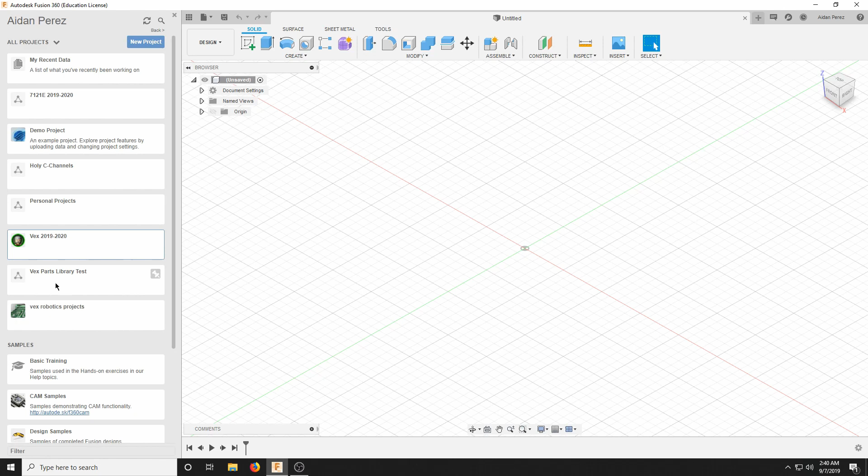So I'm going to create a very basic chassis using this part library that I made in the last tutorial video. If you haven't seen that yet, I recommend you watch that first because that tells you how to get all of these parts in the first place. We're going to be focusing primarily on just one part for the majority of this video, and that is C channels. So I got two files here, the holey 3 wide and the holey 2 wide.

I'm not going to get into topics of build quality, but we're going to make this chassis out of 2 wide C channels, and we're going to make a very simple 30 by 32 chassis.

So first we're just going to save real quick, because you can't drag and drop anything until you save and name a project. So we're going to name this something simple, early season chassis.

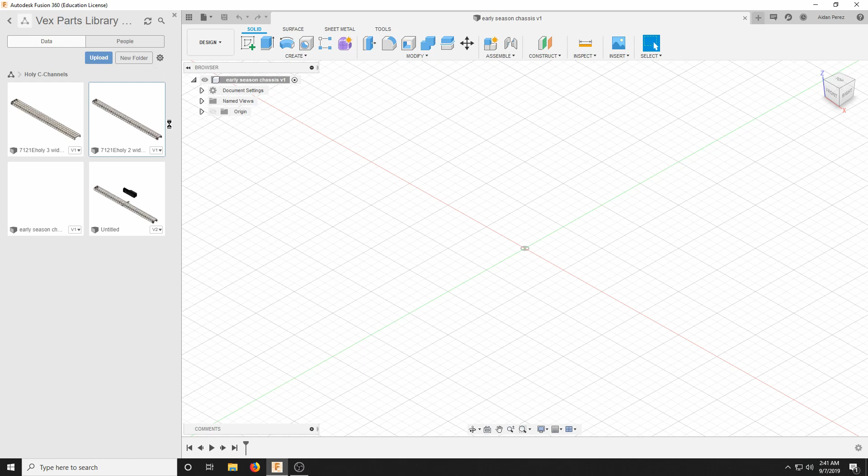So now that we got a project here called early season chassis, we're just going to drag and drop a couple C channels here. We are going to angle them in the way we want them to. So this is a demonstration on how to rotate and manipulate the angular geometry of your C channel.

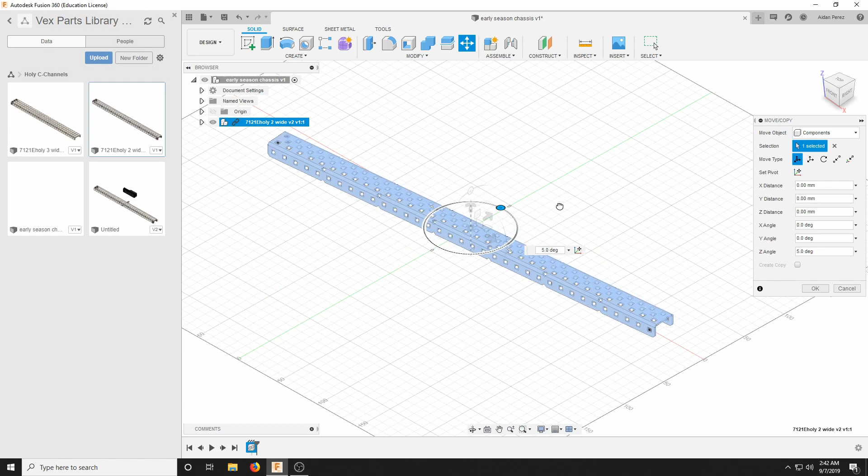So you can rotate them on the X, Y, and Z axis. Here we're rotating on the X and the Z - it's kind of hard to determine in a three-dimensional view. Oh, actually it's telling me right here it's the Z angle. Alright, so I'm royally failing at this tutorial already, but that's irrelevant.

We're just going to eyeball what angle we need this to be at, and we're going to flip this around for simplicity's sake. Alright, perfect. So as you can see, we got a C channel, and we're going to copy and paste it just so we have two of them.

You don't necessarily have to copy and paste, you can just drag and drop on every C channel in, but we're just going to copy and paste because why not? So now you got two C channels. These are going to be the C channels that go along the width of the robot.

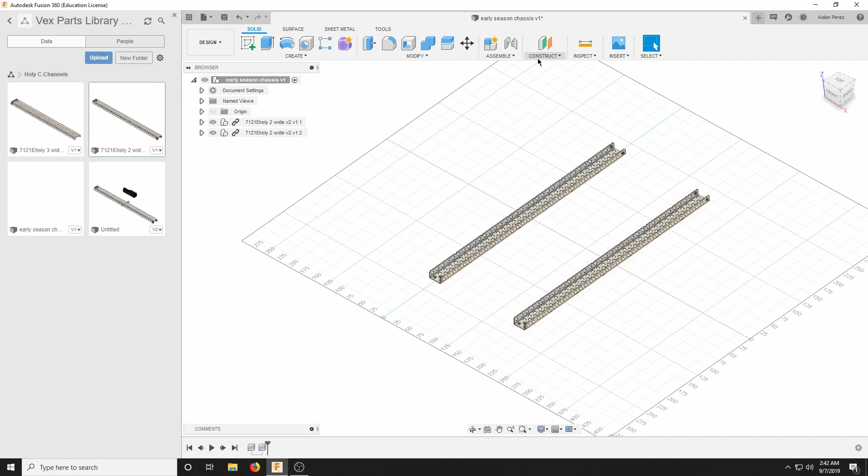However, how do we cut these C channels? Because as you see here, they're 35 holes long, but we need this to be 30 holes long. Well, the way we do that is by using midplanes.

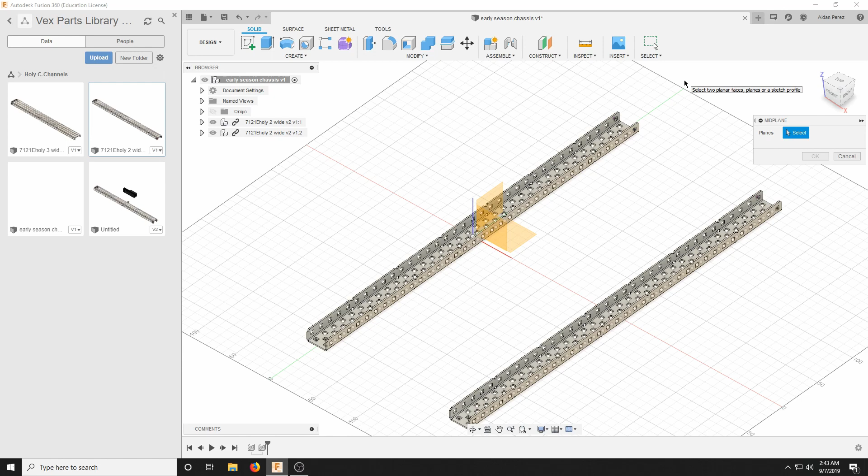So what you're going to want to do is go to construct, and you're going to want to find the midplane option. And you're going to be put up to this screen. So the way that you create a midplane is by selecting any two planes, any two flat surfaces, and it will create a construction plane of sorts in your project.

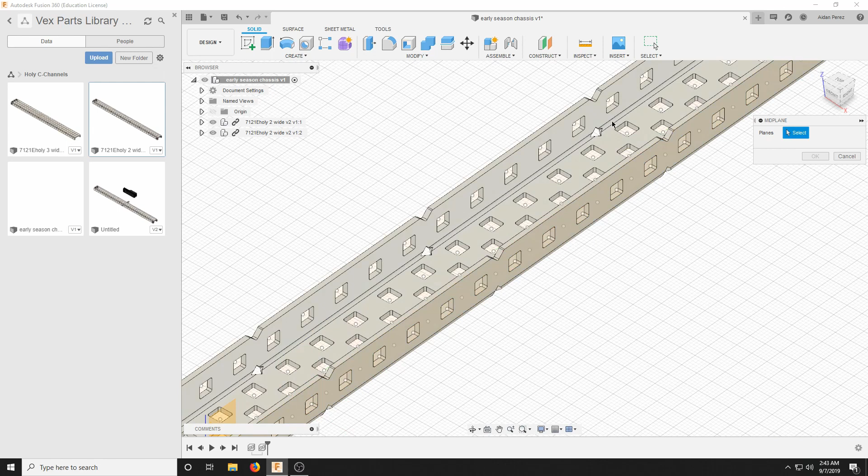Basically what I'm saying is, if you want to cut a C channel to a particular hole, you're going to want to find one of the middle holes of the C channel, and you're going to want to create midplanes between the two holes. So in this case, we want to create this 35 long into a 30 long.

So we're going to want to chop off these 5 holes. We're going to go to this middle hole, and select this plane. We're going to angle it, and select this plane. And it'll create a midplane in between these two planes, hence the term midplane. And we're going to click OK.

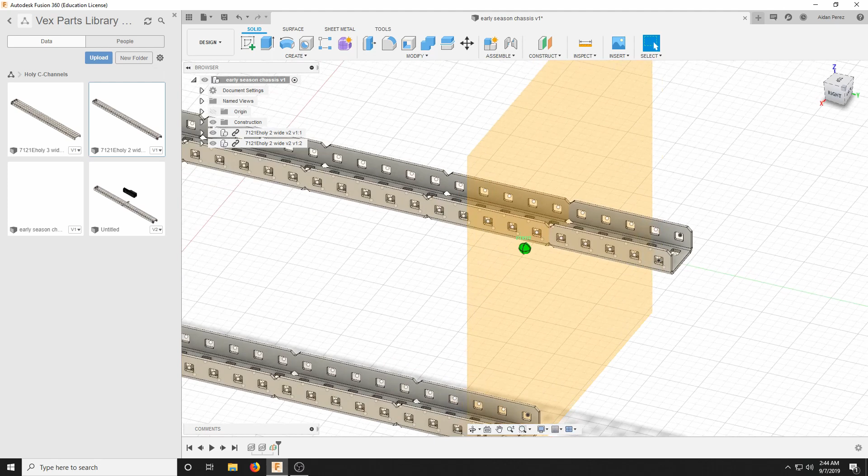So as you see here, it has created a sort of imaginary cut that goes in between the little nook in the C channel. So now that we created this midplane, we're going to go to modify, and we're going to go to split body. We're going to split the part that we want to cut, which in this case is the C channel.

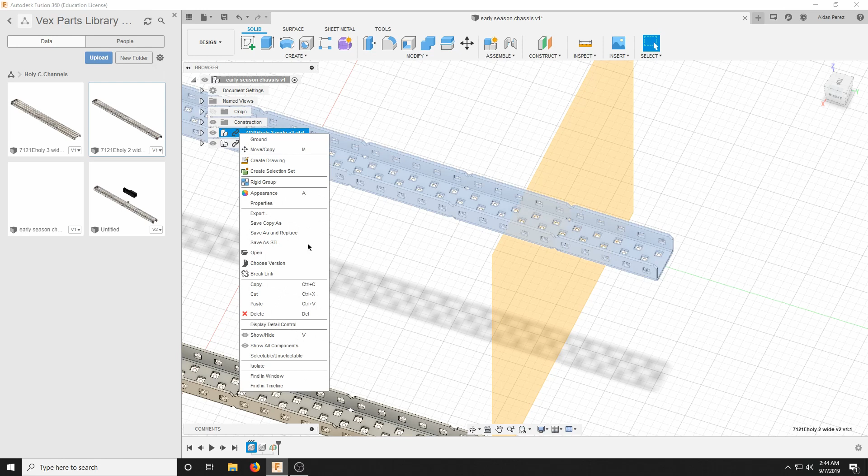So the body to split is this, and I have made an oopsies because I did not unlink the C channel. Hold on. You're going to want to break the links on both of these C channels before you actually do anything with them, or else you can't modify them.

So we're going to split the bodies, we're going to select the C channels, and the splitting tool in this case will be the midplane. And now we're going to click OK. Now notice here we have this line going through the C channel where our midplane is.

We have created two separate bodies: body 1, which has the 5 holes we wanted to cut off, and body 2. Now we know we want to get rid of body 1 because those are the 5 holes we need to get rid of to get 30 wide.

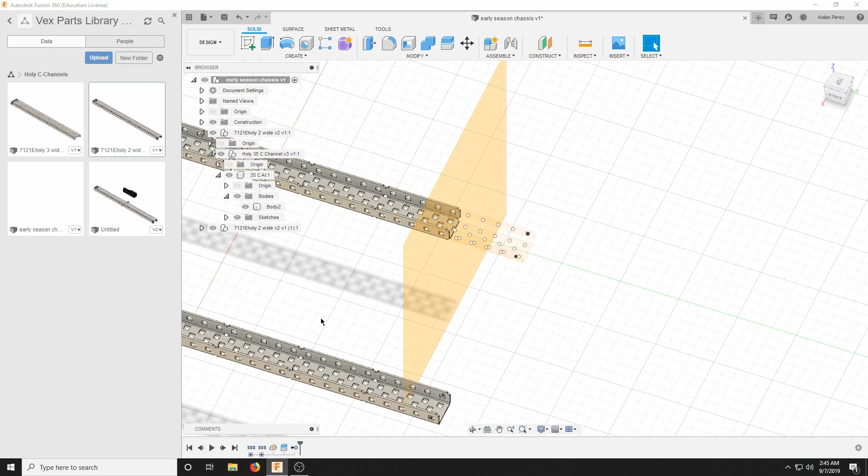So what we're going to do is right click on body 1, and we are not going to click delete. Clicking delete creates some awkward issues that are easily avoided if you just click remove. Once you click remove, you're free to delete the midplane. But only delete the midplane after you remove, not before, or else you're going to have to redo everything again.

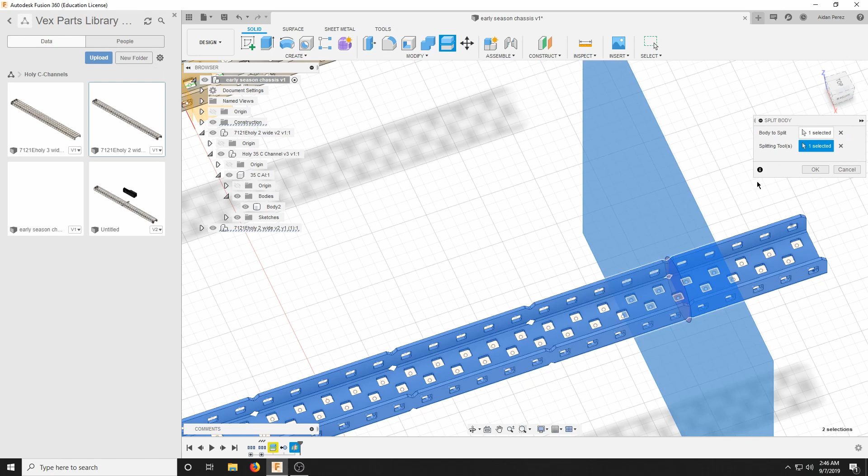We're going to do the same thing here. We're going to create a midplane by going to the middle hole of whatever we need cut, so we're going to cut off these 5 holes. We're going to split body using the splitting tool, and then go back here.

See that we need to get rid of body 2. Right click, remove, and then delete the midplane.

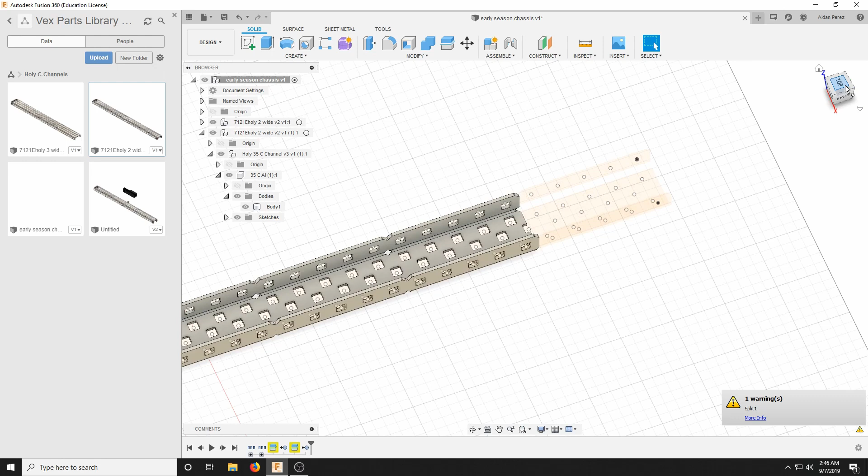Now you see we have these little ugly floating dots and planes. These have no reason to be here. Obviously we're not going to join anything to anything here, because if this was a real robot, this would just be empty space. So at this point, you're free to use the selection tool, which is your left mouse button.

Just drag over these excess planes, and you should theoretically be able to select them. So you could just hover over those, select all of those, and delete using the delete key on your keyboard.

And you'll still have these little dots. There's not really anything you can do about these, they're always going to stay, but it does clean up things a little bit. If you use an app like A360 to view your CADs, none of this shows up—it'll just show the solid bodies, none of the iMates or construction planes.

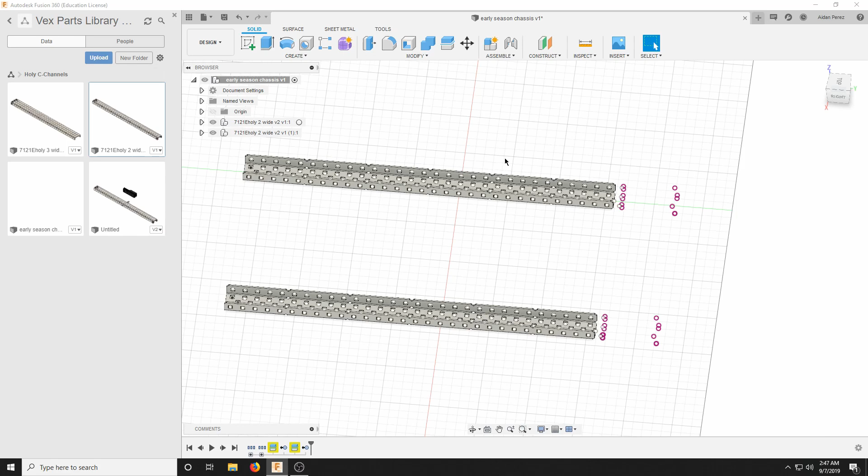So now that we have these 2 C channels, we need to give them, say, longitudinal, lengthwise C channels to accompany them. So we're just going to spawn in 4 C channels and orient them to how we want them.

Usually if you want to save time, instead of just going here and dragging it to 90 degrees, you can just go here, edit it a little bit, and then just type in 90, and it instantly snaps to it.

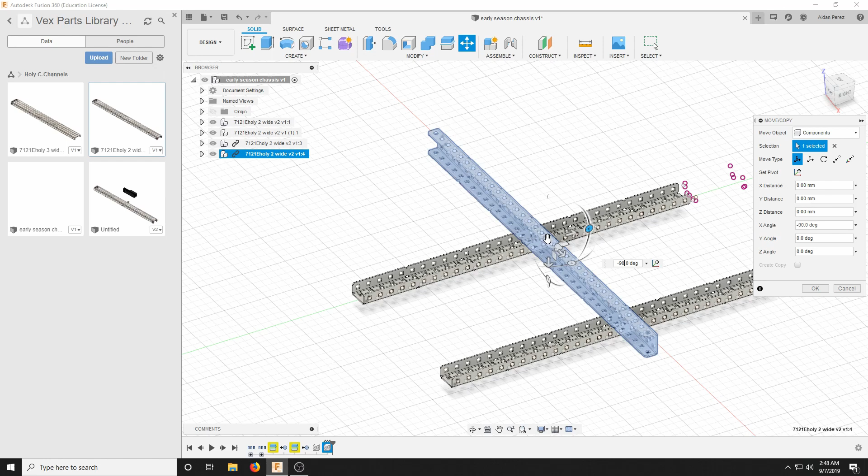So we're going to create just 4 C channels. Really doesn't matter where they are now. We're just going to plop them into randomness, and we're going to make them all coherently attach in just a minute.

Okay, so we have all of our C channels, and we don't necessarily need to break the links on these, but we're just going to go and break all of the links here, since we are going to cut these—we're going to cut 3 holes off of them. We're just going to move this out of the way so it's a little easier to see what we're doing.

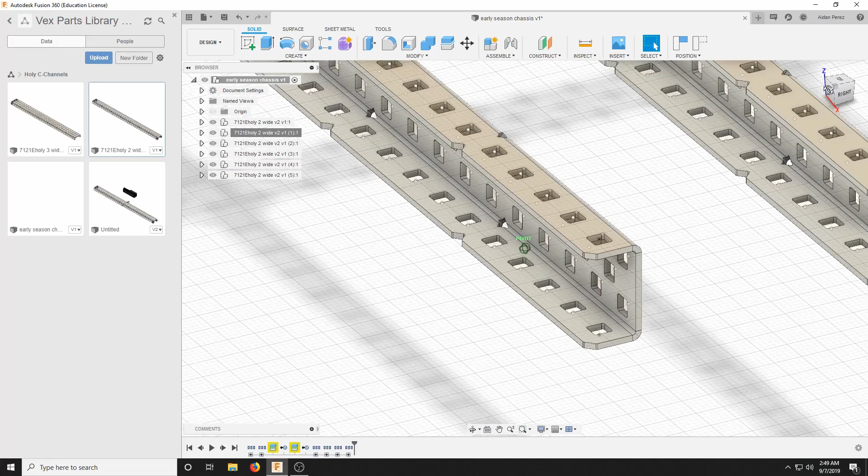And we are now going to joint the C channels together to create a rigid structure. So to do this, notice how on all of the C channels we have these little white dots. What we're going to do is select one of these white dots.

Well, first we're going to click joint and click continue. Capture position—sorry, you want to click capture position.

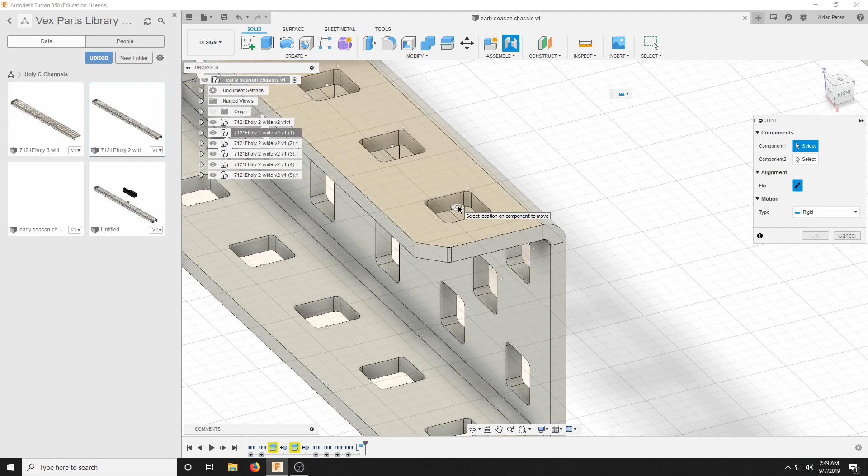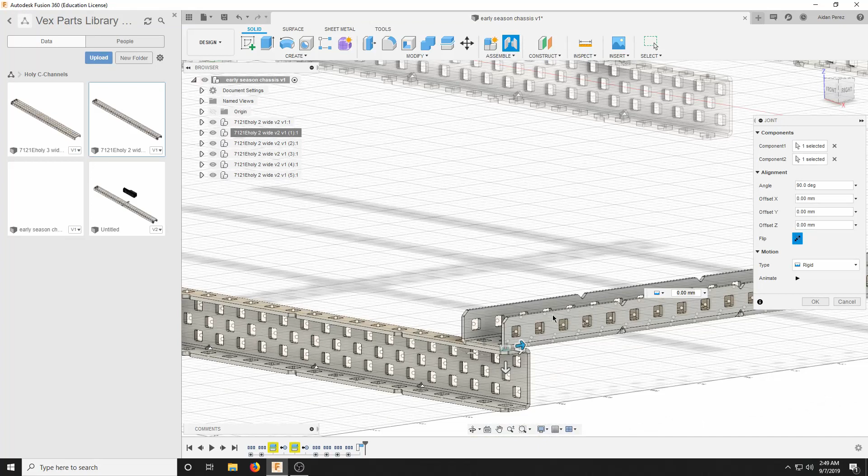And you're going to want to select these dots. So you're going to select the dot here, and select it to the accompanying dot that you want to mount it to. So in this case, we're going to mount it to this dot. It's not arbitrary where we're mounting it—this is just so if this is how you want your structure to look, you're going to match it to how you would want it to look in real life. And then we're going to click OK.

And we're going to repeat that. We're going to make this, say, a 4-hole wide wheel gap. Select that—1, 2, 3, 4—and then just pop it here.

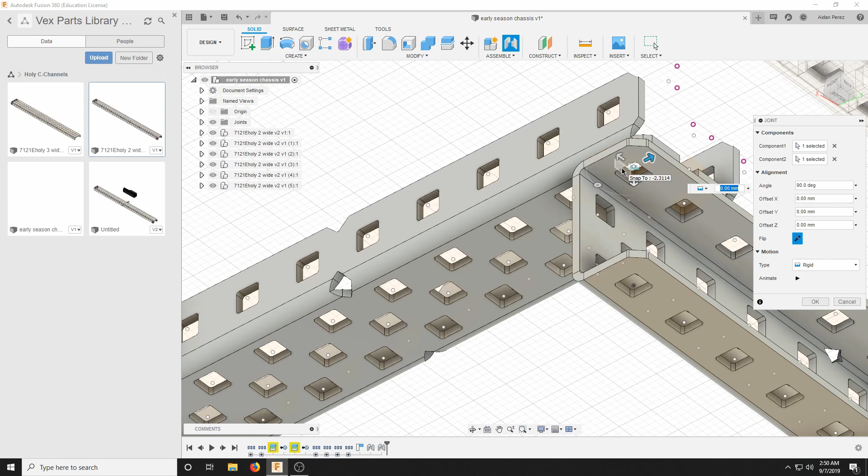We're going to repeat that with the other two C channels. This is basically the fundamental idea of how you connect C channels together with holy C channels. You just use the eye mating dots, and connect and joint the dots to whatever dot you want it to join to. It's 2:50 a.m., so I apologize if I'm a bit incoherent, but hopefully the visual representation of what I'm doing is better than my verbal explanations. And here we go, now all of our C channels are linked.

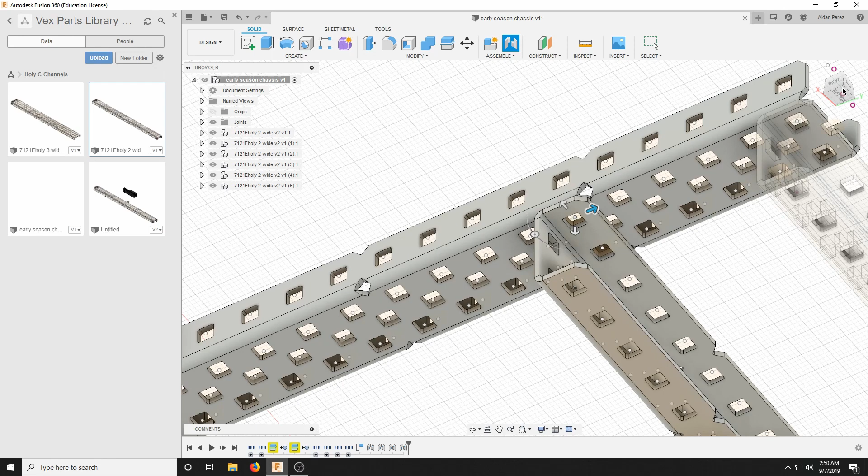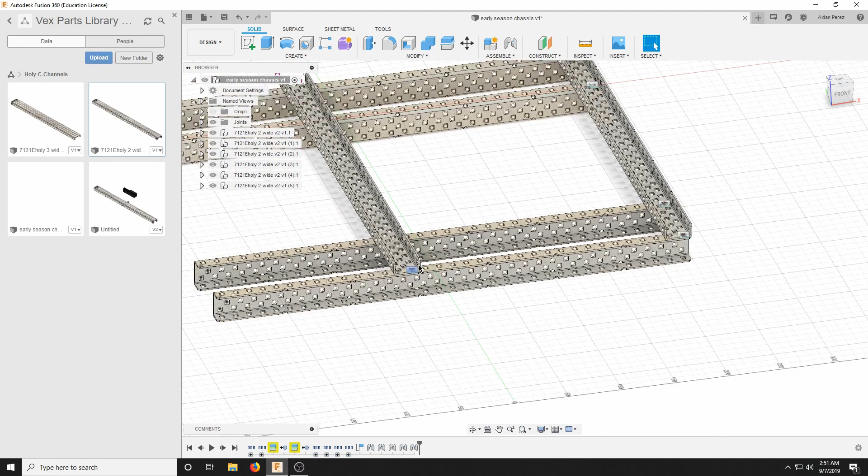We have here this other C channel. This is because when you're making a chassis, you're going to want at least 2 C channels going across the entire robot. When making a real robot you might think more carefully about where you put the C channel, but we're just going to throw it anywhere - it doesn't really matter. An important thing to note: you don't need to join every C channel. Once you create a joint here on this C channel, you don't need to create 2 more joints to link this C channel to that one and vice versa. Once it's connected to this, it's connected to this entire structure.

To emphasize this, let's see how this works. If I move this C channel, it'll move the entire chassis structure, because this C channel is jointed to this C channel, which is jointed to this C channel, which is jointed to this C channel. It's all transitive property, so it all connects to each other.

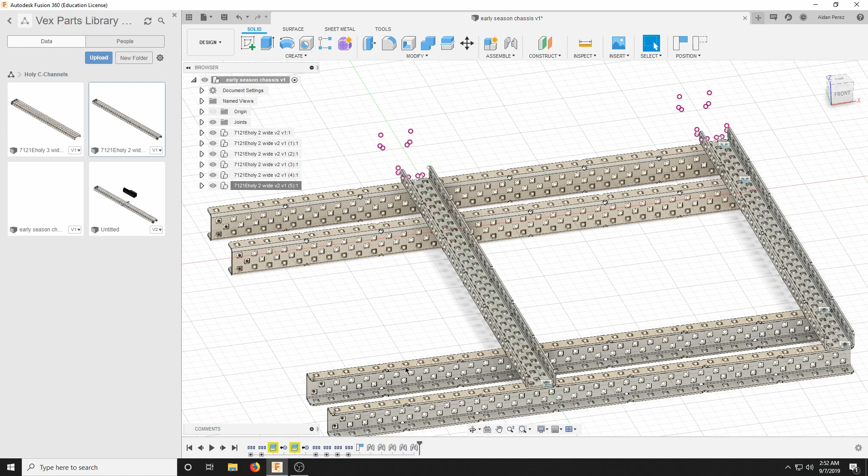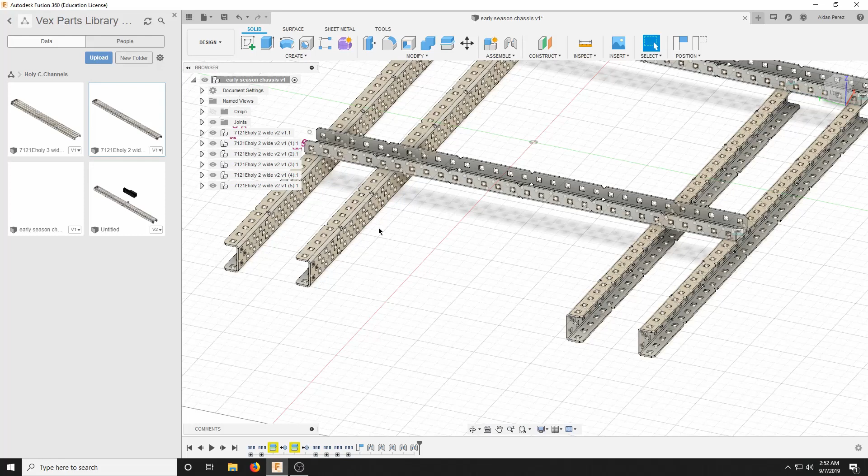It's all uniform. But as we said, we wanted to make this 30 wide, which we've already done, and 32 long. Now I'm going to show you something you can do in this scenario. We have 4 C channels, all on the same plane, and all pretty equal in how they're laid out. So instead of creating 4 midplanes for 4 C channels, we're just going to create 1 midplane for all 4 C channels.

We're going to go to any one of these C channels - this one is looking the cutest, so I'm going to cut this one. We're going to cut these 3 holes off, so that means 1, 2, 3, this one, yes. We're going to create a midplane like we did before. Select OK, make sure that this is correct. Yep, so we're cutting off 3 holes.

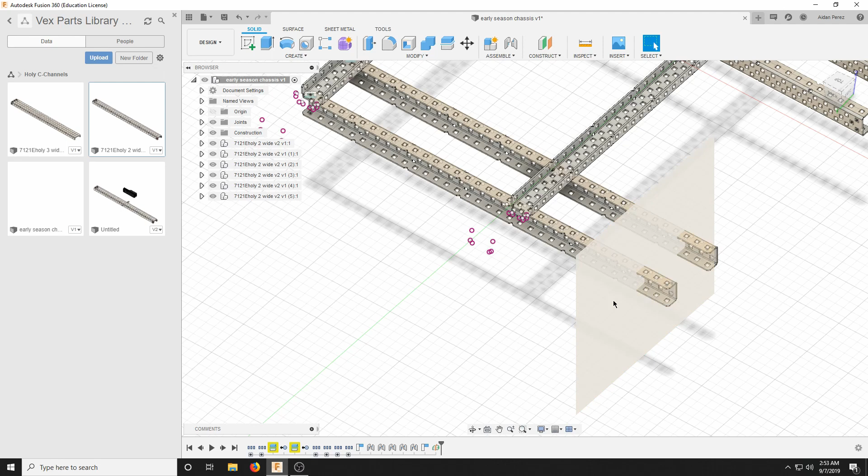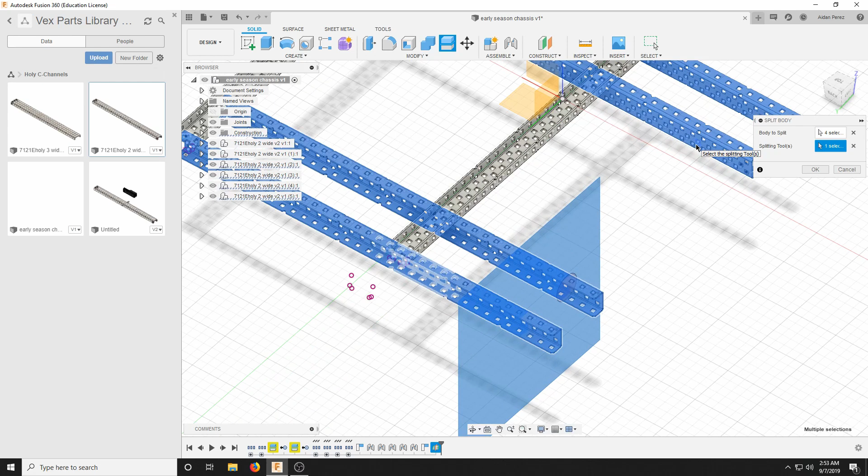This midplane, even though it only shows this square, in reality according to the program, goes on for infinity in every direction. So this allows us to go to split body, and we can select all 4 of these C channels and select this splitting tool. If we click OK, it will split all 4 of these C channels, because this midplane intersects the exact same points on all of these C channels, creating a nice clean cut all the way across the robot.

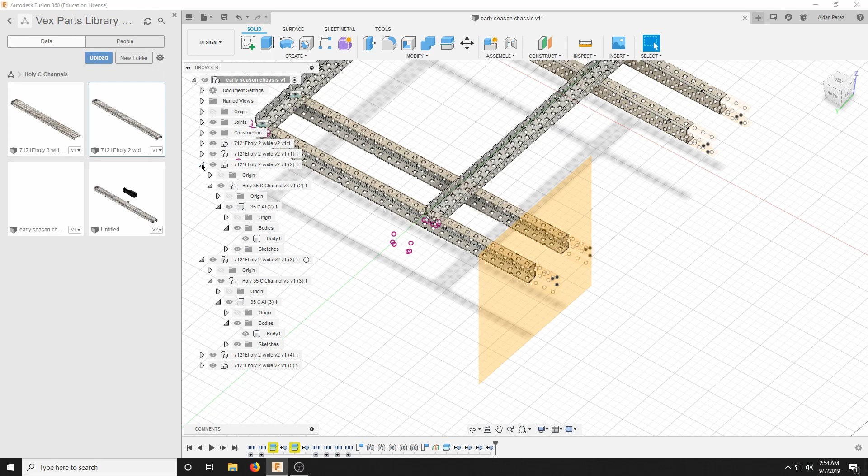So we're going to do what we did again here. We're going to go to bodies and remove what we don't need. Go to bodies, remove what we don't need, and keep going until we get what we intended to make. Alright, like that, we've removed all the bodies - sounds pretty morbid, but we've removed the bodies, which means we can now delete the midplane.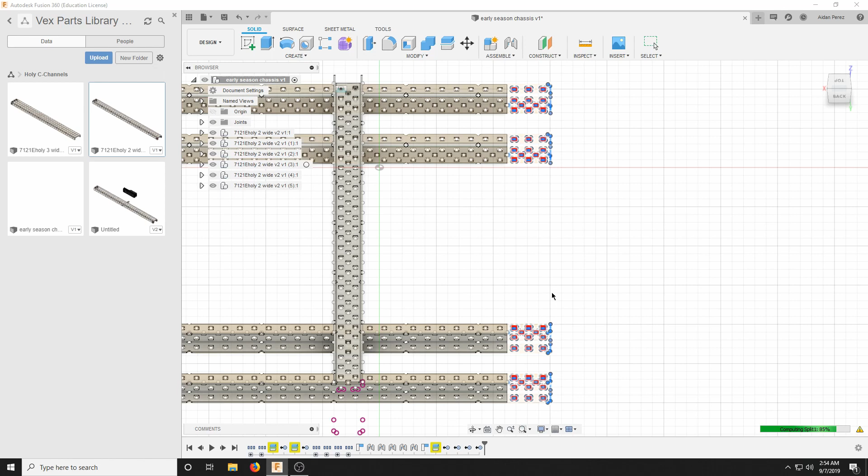Now that we have all this little excess crap, we can just select it. Let's go in this view because maybe it'll be a little more friendly. There we go, and then just click delete. You're gonna get weird split warnings - for the most part, just pay attention to these to make sure you're not doing anything stupid, but you can kind of ignore these because they're not really going to affect how your construction looks. So just like that, we've created a 30 wide by 32 long chassis.

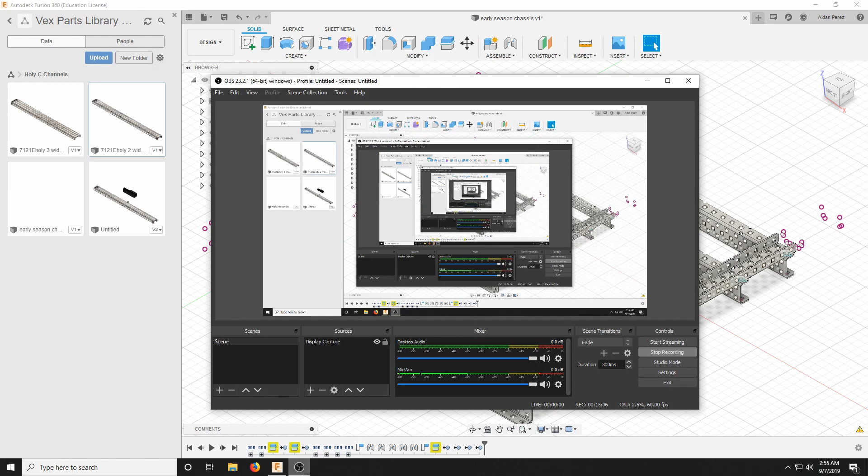Which is pretty great, but obviously a robot is more than just a chassis, so we're going to have to add things like wheels and bearing flats. There are two ways you can model wheels and sprockets and your wheelbase - you can either do it the proper way or the improper way. I'm going to show the proper way first, and this involves me tapping into another project, so let's hope I don't accidentally...

Well, this is from last year, so I'm not going to leak anything, but we're going to go into here and we're going to spawn in a bearing flat, and we are going to just orient it to exactly how we need it.

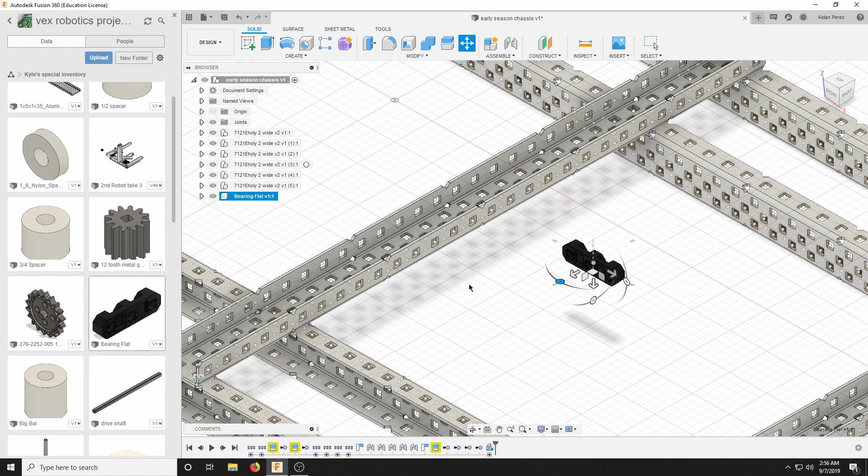And we are going... actually, I did this wrong. I need this to be the other direction. Realize how these C channels are laid out. It's not like how it is on my actual robot. And then from here we could just copy and paste.

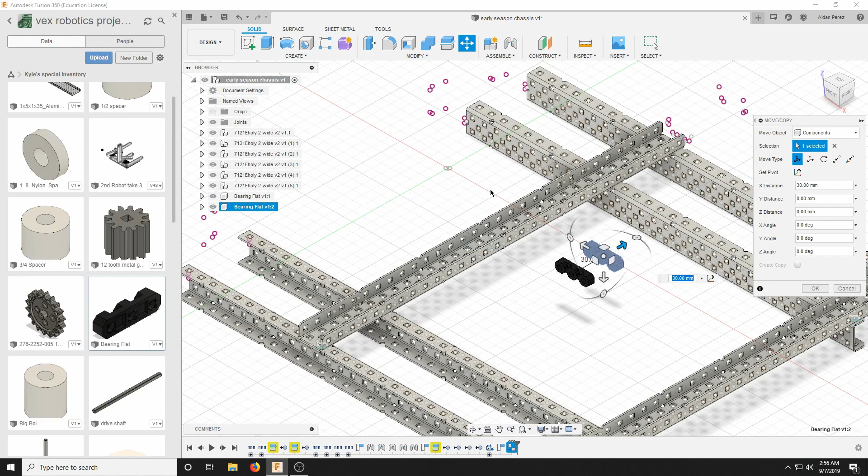Capture position. You always want to capture the position. If you just press continue, it creates a lot of weird problems that you can easily avoid by saying capture position. We're going to spawn in a drive shaft.

And this we're just going to keep at this angle. We're going to spawn in a sprocket and angle it to how we need it. I accidentally made that perfect, but that was by accident, but that's kind of foreshadowing what we're about to do.

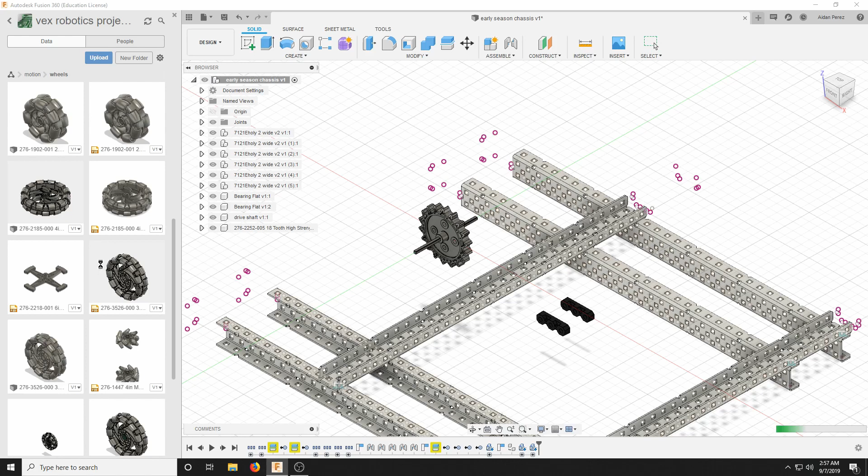And we're going to go and throw in some wheels as well, so let's put in some 3 1/4 inch omni wheels. This one. Oh yeah, this one we're gonna use spawn.

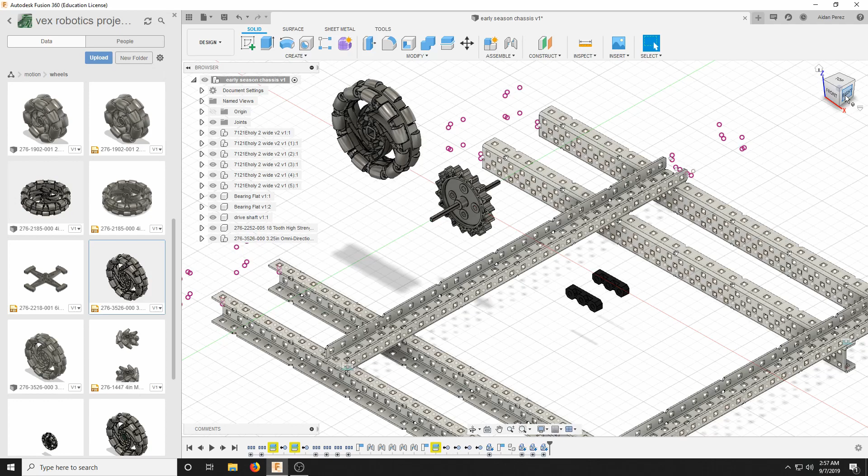Okay, so we have all of our components for a wheelbase. So this is the proper way to do it, in air quotes, proper. It's a little bit time consuming, but if you really want to make things more professional looking, then this is the way to do it. Even then I'm kind of cheesing it because I haven't really practiced enough with this to say that it's the proper way, but this way you create a lot more joints and make this entire thing rigid.

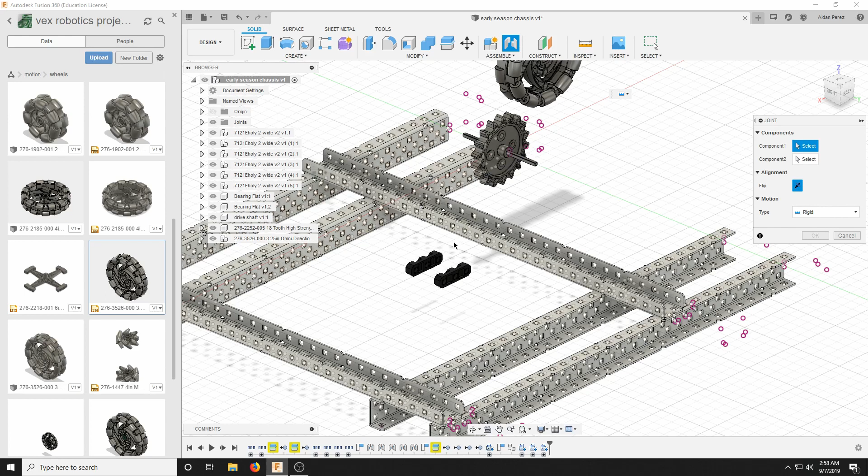There's a quicker cheat way that I prefer to do it, but it kind of just involves making the wheels and sprockets float in existence and not connect them to anything. But let's just continue.

So these bearing flats do not have any mating points, but just because they don't have any mating points doesn't mean we can't joint them to the chassis. If you notice, when you press joint, you can select these planes and it'll create a joint point for you. So the way we'll do this for connecting the bearing flat to our chassis is if you go to these holes here, it will actually create a joint point.

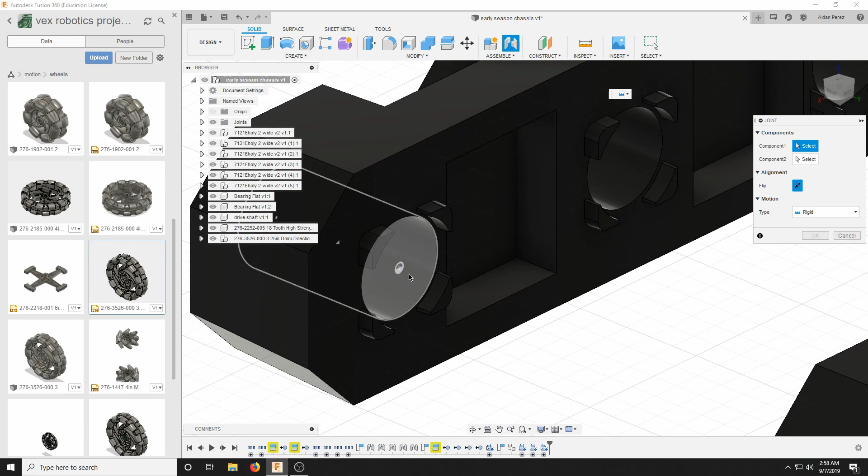Location - what does it say? For a component to move. All right, that's a good description. At the circumcenter of, say, this little cylinder part here. So we're going to select that. So that's component 1, and we are going to link that wherever you want that bearing flat to be. In this case, we're just going to put it right here.

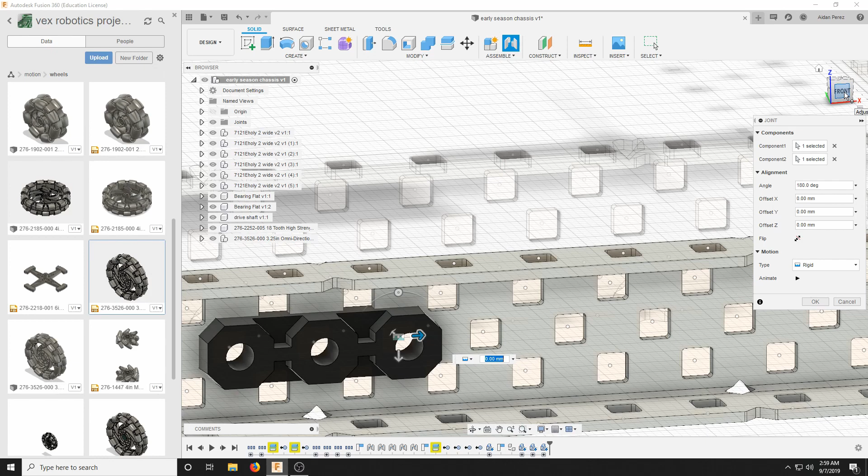And here's something important to note: the eye mating points on VEX C channels are only accurate to the flat sides of the C channels. So that means if you try to join anything on the inside of the C channel, it's not going to be aligned right. Notice here, Fusion doesn't want to freeze on me, that this isn't aligned correctly. Obviously these little knobs, these little clip-on points should be snug within the little gap here in the C channel.

And this will be the case always, so it'll always be offset by exactly 1.5 millimeters. That is a golden number you're going to want to remember in your head. Anything that you joint to the inside of C channels, you need to offset the joint by 1.5 millimeters for it to be aligned, because this is 1.5 millimeters in width.

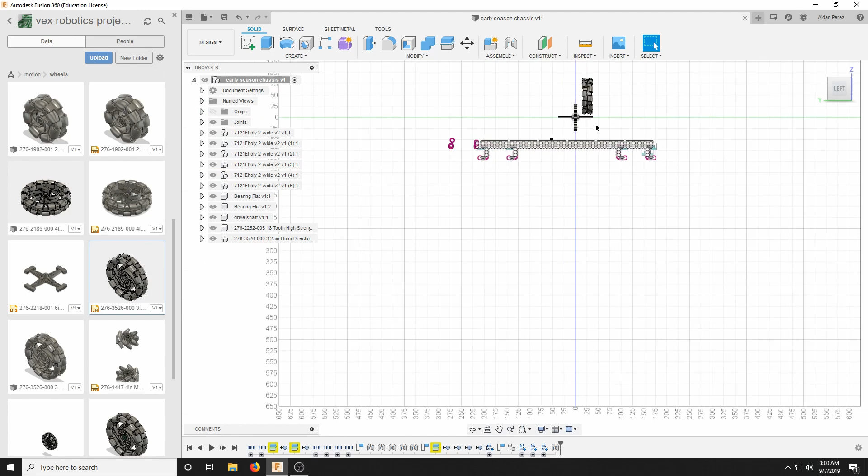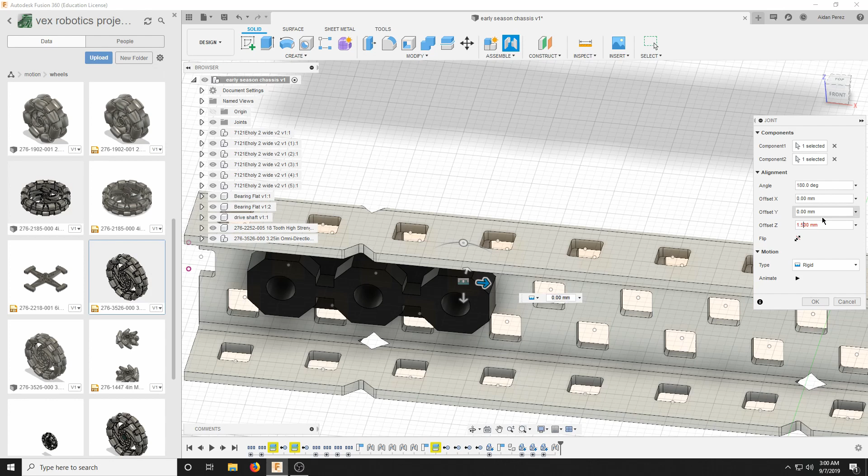So we're going to repeat that on the other side. Assemble another joint, and just connect it here. Same deal - I remember this was on the z-axis, so we're going to do 1.5, and negative 1.5 actually. Okay.

And now we have rigidly mounted these bearing flats, so if we move anything here, it's going to keep the bearing flats in line. Now we want to put the axle here. So how do we put the axle into the bearing flat? How do we join the axle to the bearing flat?

Well, it's also important to note that an axle is a revolving object, so there are multiple types of joints. We've only shown rigid joints here because when you're making a chassis, obviously it's a rigid structure. But you can make - I'm going to butcher the word - revolute joints. You can make slider joints, cylindrical joints. Really, the only ones you're going to use are rigid and revolute.

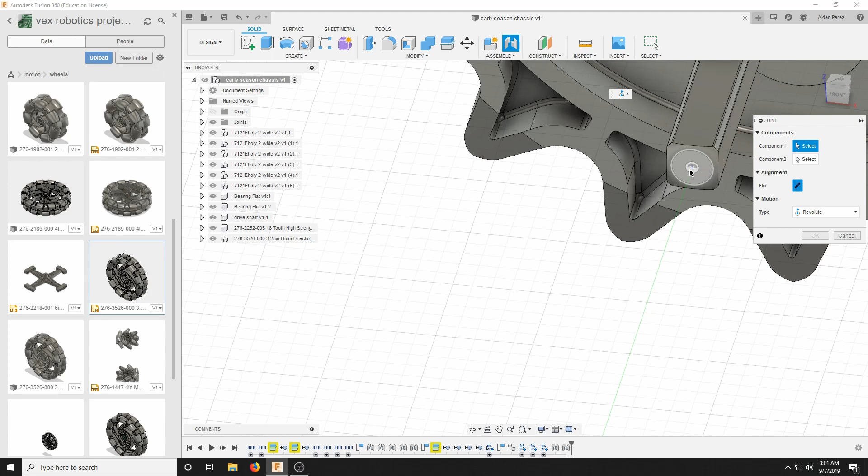So we're going to select a revolute type joint, and we are going to select this little circular bit at the end of the axle. And remember how we can create a joint from the circular bit inside the bearing flat here at the circumcenter at the end of this cylindrical tube here. So we're just going to select that as well, and it'll create a joint. As you can see, it's trying to calibrate the movement, so it's going to rotate a few times inside there, and we're going to click OK.

Now what's awesome about revolute joints is that once you create them, it'll create this little flag here. You can double click that flag, and then you could freely rotate the object on that joint's axis, its axis of rotation. So we're just going to leave that at 0.

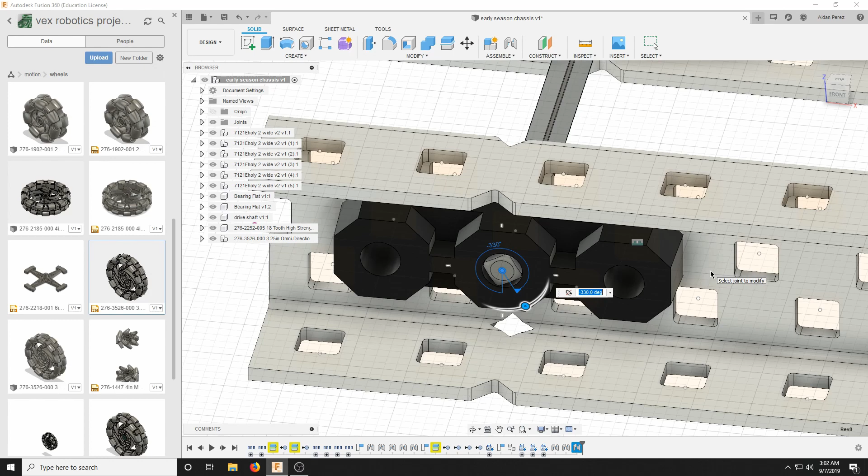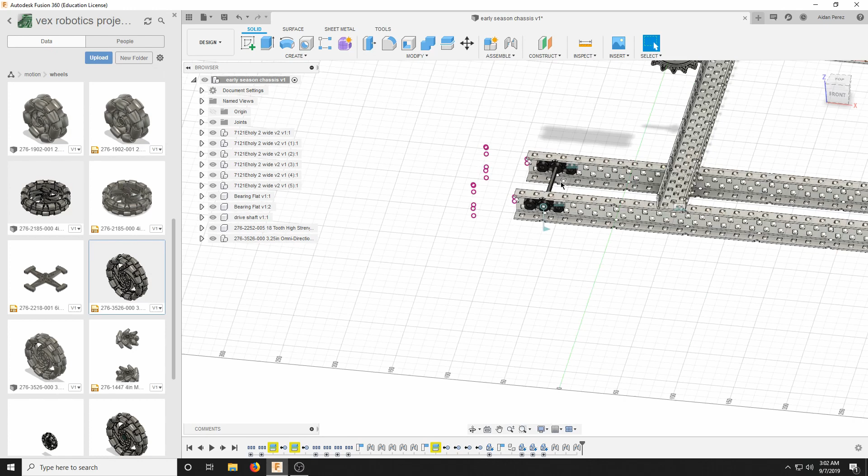This is really good if you have a lift mechanism you want to model. You'll put the joints as revolute so that when you move one side of like a 4-bar, it'll move just like a 4-bar would in real life. You wouldn't have that if you mounted it rigidly. It's also really good if you're making hinges, especially for this game, if you're trying to model a hinge for like a tray mechanism. But regardless, we have bearing flats, we have axles, but we also have these sprockets and this wheel.

This wheel is a tricky situation. We're just going to do the sprocket first, because all you need to do is select a central point here at the end of this flat plane. You want to make sure the flat part of this plane is highlighted.

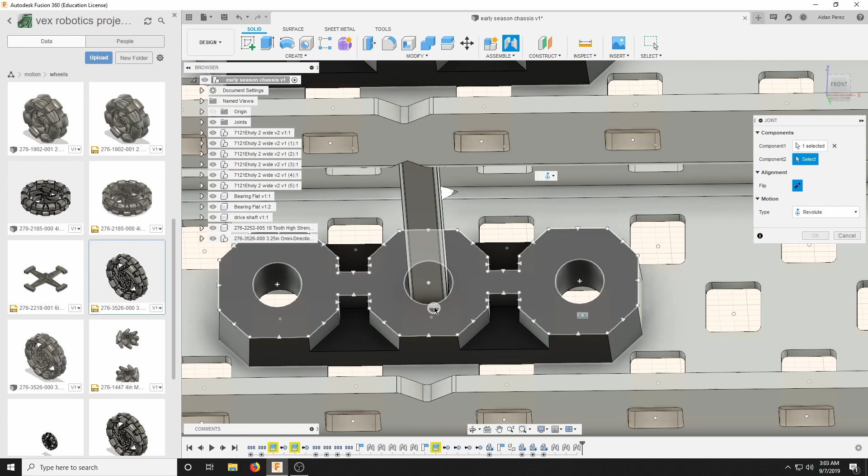Select that, and you're going to want to select the flat part of the identical side on the axle. So to show what I mean here, we're going to go onto this plane on the axle, make sure the right flat plane is highlighted, and we're going to select a central point here.

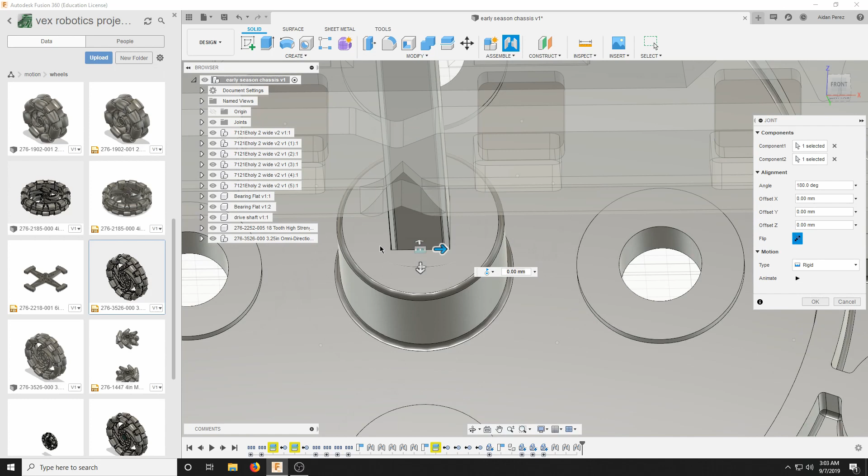Okay, now obviously we don't want this to revolve, we want this to be rigid because we want the sprocket to move with the axle. That's another thing - once you create a revolute joint, the majority of your joints are going to be rigid, so when you make a new joint, you're going to notice if it's wrong because it's going to do that calibration thing, and you're going to see, oh, well that's not right.

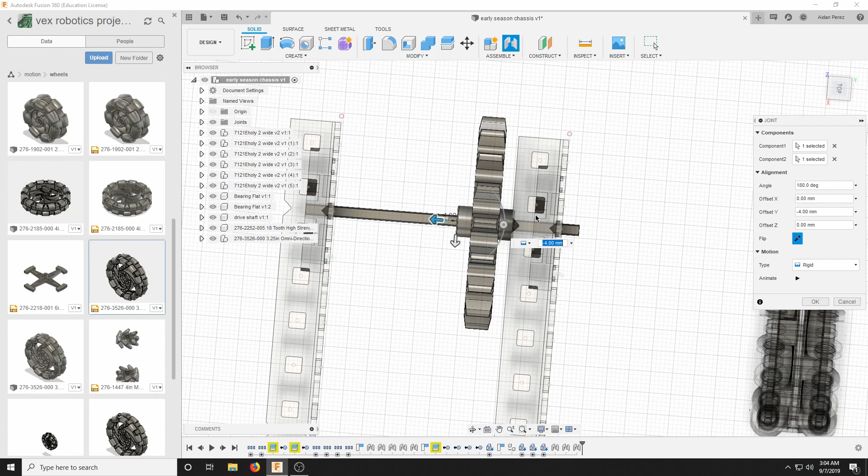But you always want to switch it back to rigid. And okay, that's actually perfect, that's kind of where I want it to be. And of course, when you create a joint here, if it's not in the right spot, you can offset it on its particular axis, and it will only shift it on that axis. So if you move it on this axis, it won't awkwardly move anywhere else. So we're just going to offset it by -4 millimeters and keep it there.

And we have the sprocket. The same deal would go for the wheel. The only reason I'm a little apprehensive to try with the wheel - you can do the same exact thing and get the same exact outcome, but in this case, since this doesn't have an insert inside of it, you'll have to offset it by a particular measurement so that it's centered onto the axle. I'm not entirely sure what that exact measurement is at the moment, so I'm not going to spend my time doing that right now.

But this is a great time to show here that since we've created a rigid joint from the sprocket to the axle, but the axle has a revolute joint on the bearing flat, we could do something pretty cool here. Whenever we spin the axle, the sprocket will spin with it, which is pretty nifty, and it allows for some creativity, and it's kind of cool to see when it works.

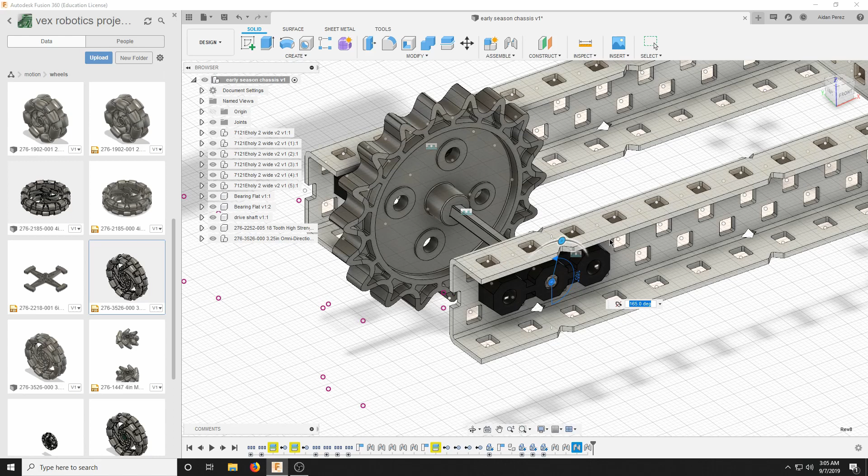The big problem is that it's time consuming. So I'm going to go here and create another sprocket, and I'm going to show you the cheat way to do it.

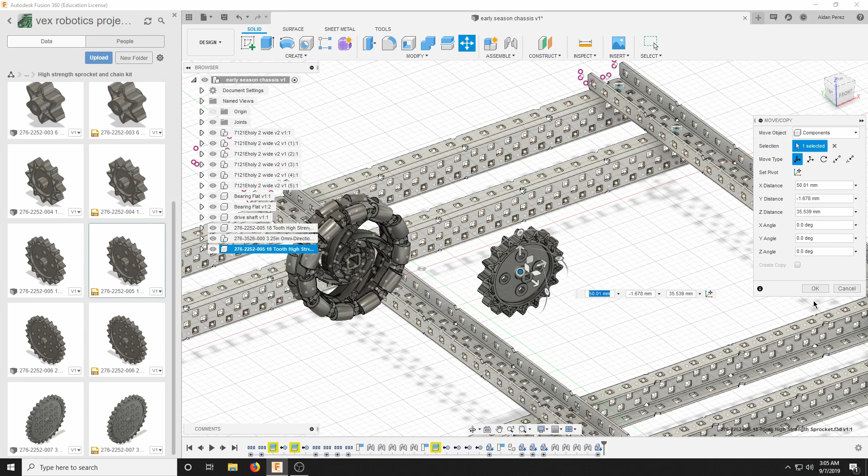First of all, modeling bearing flats isn't really necessary all the time. I almost never model bearing flats on my robot because whenever I'm making it in real life, I kind of already expect where the bearing flats are going to be. It's usually not necessary to model it if you're just trying to get an idea, because the main reason behind CAD is to get an idea of your main structure, not to go through every minuscule detail, at least when it comes to thinking of designs and stuff.

Maybe if you want to make a final version of your entire robot already and you really want to meticulously make a 3D model of it, then yeah, go and put all your bearing flats in and screws while you're at it. But if you're just experimenting with designs, doing what I just did here takes a lot of time, and you're going to be spending many more hours just making that design because you're doing time consuming stuff like this.

So just usually don't bother with bearing flats, especially don't bother with screws. Screws are the biggest time waste that are completely pointless.

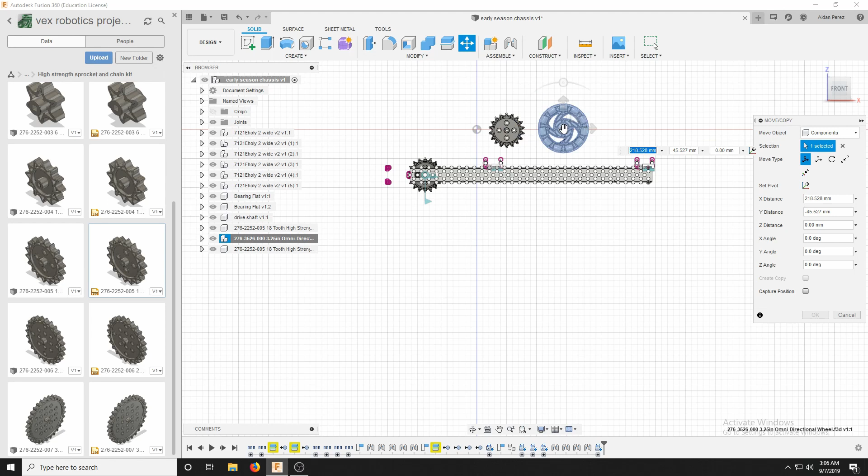But the cheat way to do this is extremely cheesy. What you're going to want to do is select a face on this little cube that gives you an orientation like this, and then physically move the wheel to where you want it to go. So say if you wanted your wheel to go here, you're just going to shimmy it on.

It's helpful to zoom in real close because you have the iMate dot here as a reference, the snap point. This snap point is at the exact center of the C channel hole, and this movement dot is at the exact center of the wheel. So you can just shift it right over here, put it right on top of the snap point.

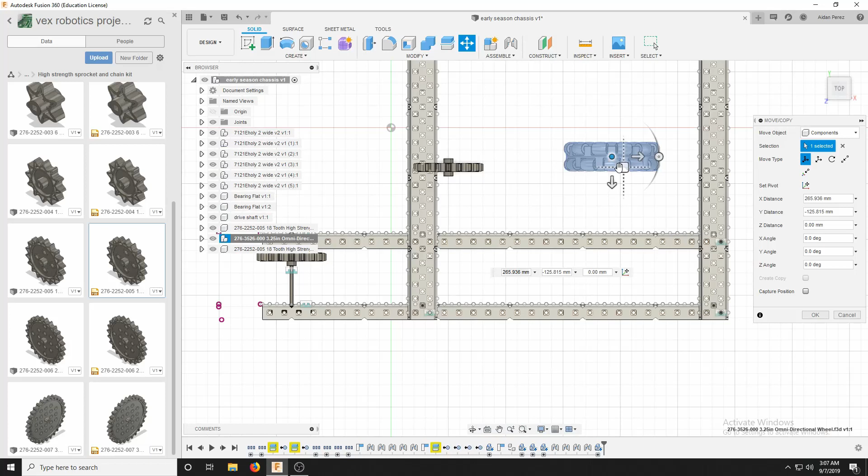This, of course, doesn't make anything rigid, but it does line up the wheel to where it needs to go. Then you can just shift it on the Z-axis here, to where the wheel needs to go. You could just put it right up to the C-channel if you have to.

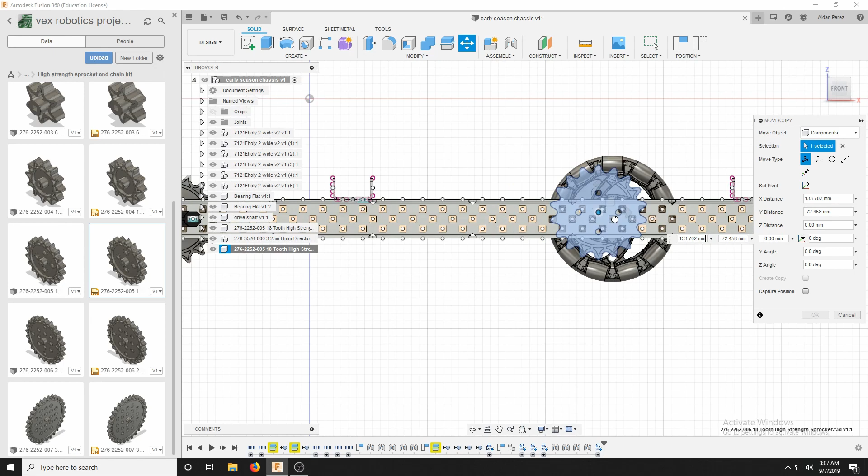You can repeat the same thing with the sprocket. You can go to the 18-tooth 2 sprocket, go back to that face view, shimmy it into place, and then just slightly move it onto here. Not angle it, move it. I don't know why I said angle.

Alright, and of course I would move it onto the Z-axis as well. Let me just do that real quick. There you go, I don't know why it's not letting me move. There, alright. And that's another thing to note.

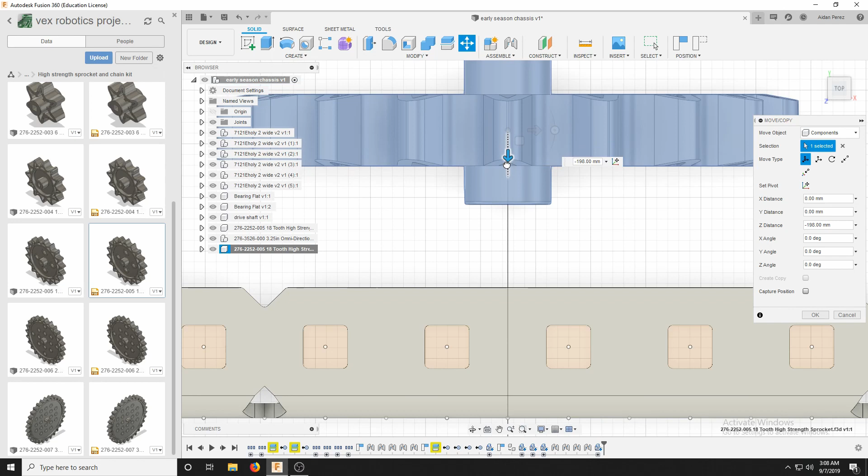If you're zoomed out far away and you move something on any axis using one of these arrows, it's going to have much larger increments of movement. So at this distance, it does it by 100s. But if you go super close up, it'll do it by increments of 1s or 5s. I think maybe at this distance it'll go by 5s. So that's just something to keep in mind when you're doing something like this.

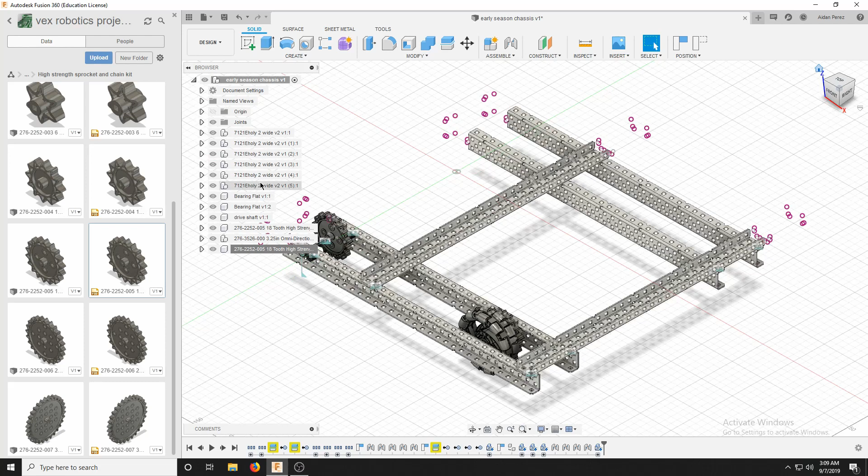But this is, again, the very cheesy way to do it. There's nothing proper about this, and the only glaring flaw is so long as you don't do something like move the entire chassis. If you do the floaty method and move the entire chassis, since it's not jointed to the chassis and there's no way to joint it, it's just going to stick there in free space and not move with the assembly. That's just a sacrifice you have to make for saving time, but you're never going to move the chassis in the first place like that, so it's kind of a moot point.

But basically, yeah, this is a much quicker way to do it.

One last thing I want to address is using standoffs and spacers, for example. The same way that we mounted the bearing flat, you can mount standoffs and spacers. Oh, I didn't put them here. Alright, we're going to have to go back.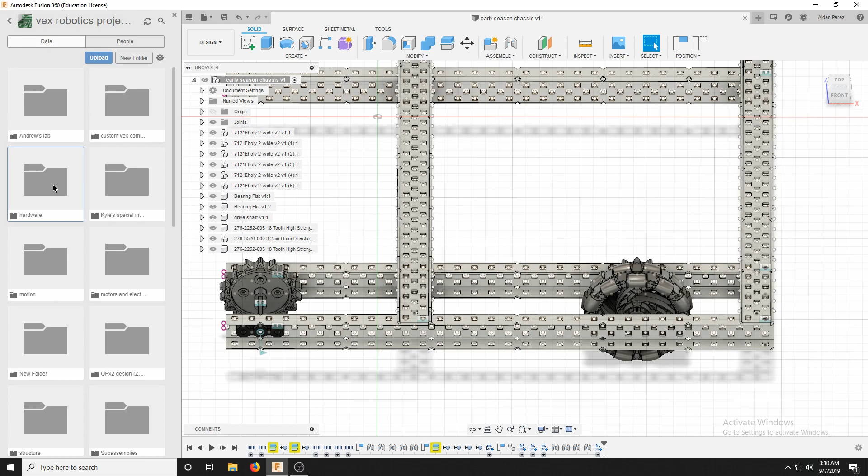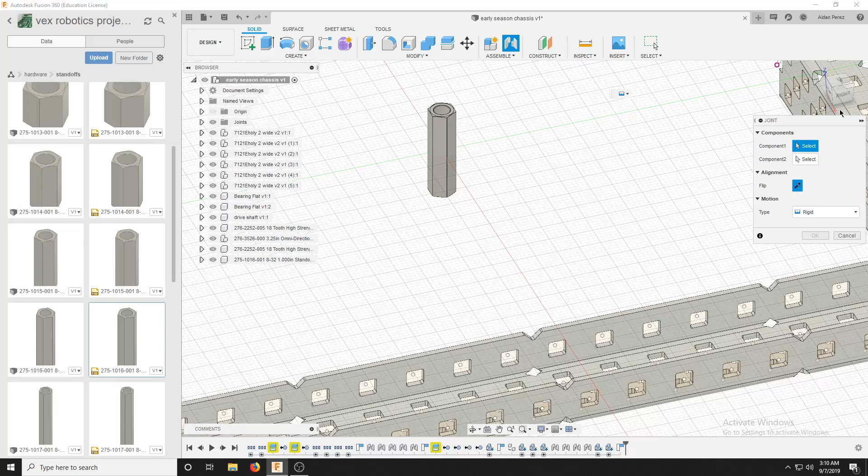So if we go to hardware here, standoffs, and if we spawn in a standoff here, we're just going to get into a view where we can angle it to 90 degrees. And if we create a joint, any object that has a circle on it, you can do the same thing we did to bearing flat. You can go here and find the circumcenter of the hole.

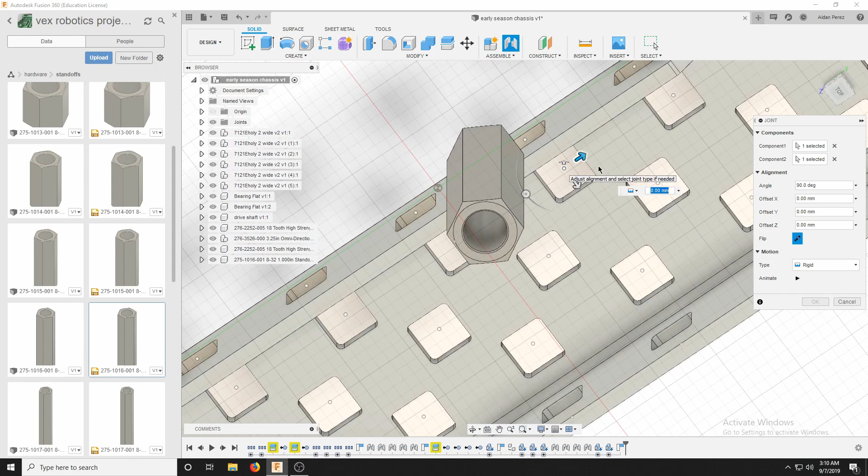When it comes to standoffs, it's a little bit tricky because see how there's like two planes here. You're going to want to pick the one closest to the bottom so you get the most accurate measurements. Then you just want to click an iMate joint, and it will shift itself into place.

Again, to note, if you put it on any of the interior part of the C channel, it's going to be physically inside of the C channel, because the iMate holes favor, as you can see in this view actually perfectly, they favor the flat side of the C channel. If you mount it to the flat side, then you don't have to do anything. But if you mount it to the inside, you're going to have to offset it by negative 1.5 millimeters, and then it's perfectly aligned.

This same principle goes for spacers, which, when it comes to general construction, the only three things you're going to use are C channels, spacers, and standoffs. That's really all you're going to use when you're building. And washers have the same effect, where you can just select their circumcenter plane as a joint and joint them to the iMate parts of the C channels.

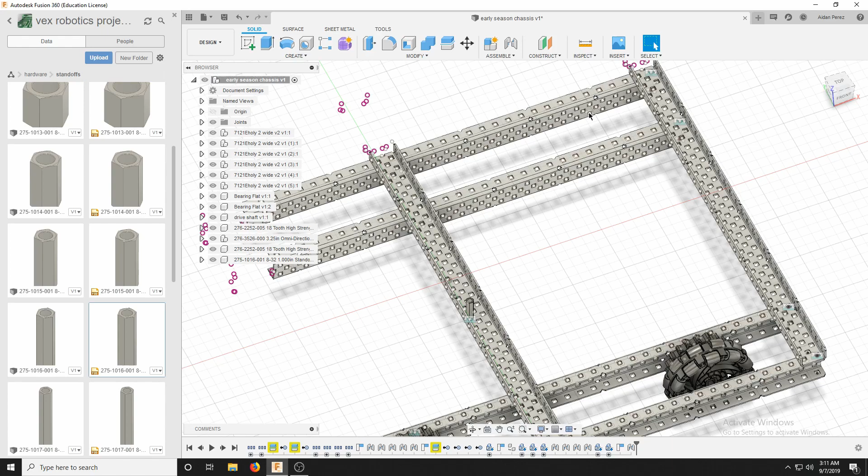And that's basically it. Just to show you what you can do with Fusion, I'm going to do something maybe a little bit risky, but I'm going to go to my Fusion project, early season. These iMate dots conceal a lot, so you're not going to really get too intricate with my designs here. If you really go on a microscope, maybe you'll see some leaks.

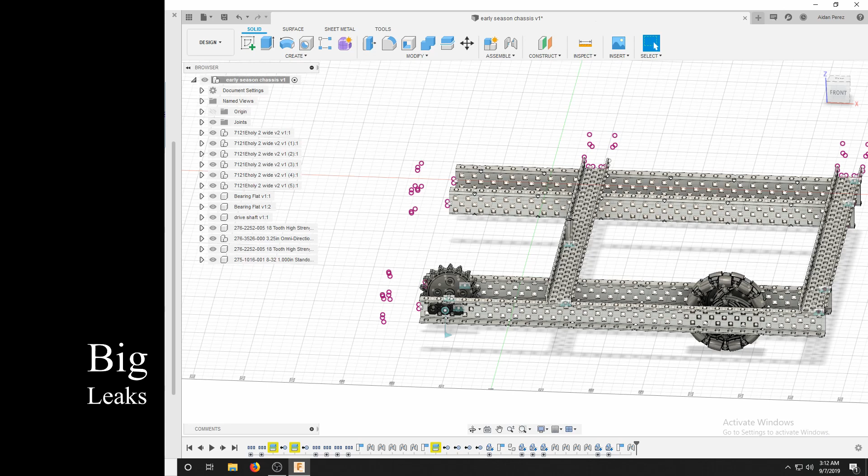This was a prototype chassis that I made early season. There's a lot of components to it, so it's going to take a second to load, as you can see.

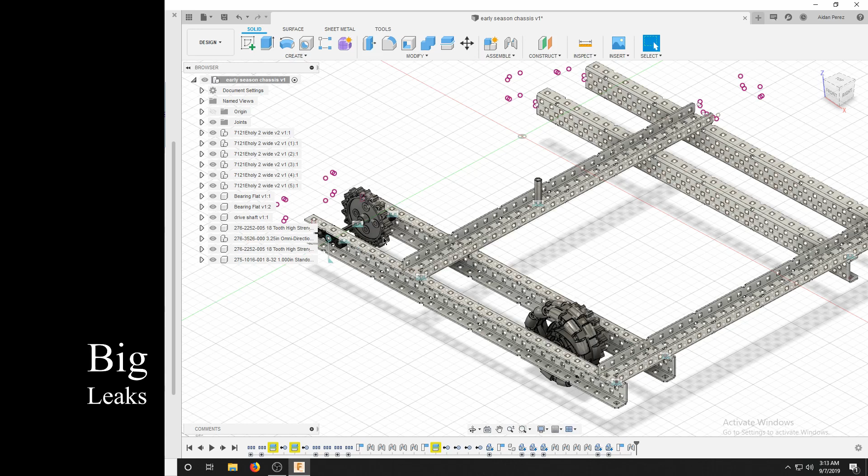That brings me to an excellent point. If you are inclined to anodize your metal or spray paint your metal, you can actually change the appearances of all of the objects that you see here. The way you do that is you go to modify, then appearances. There's a few basic colors here. You go to paint, because that's really the one you're going to want to go for when you're working on your robot.

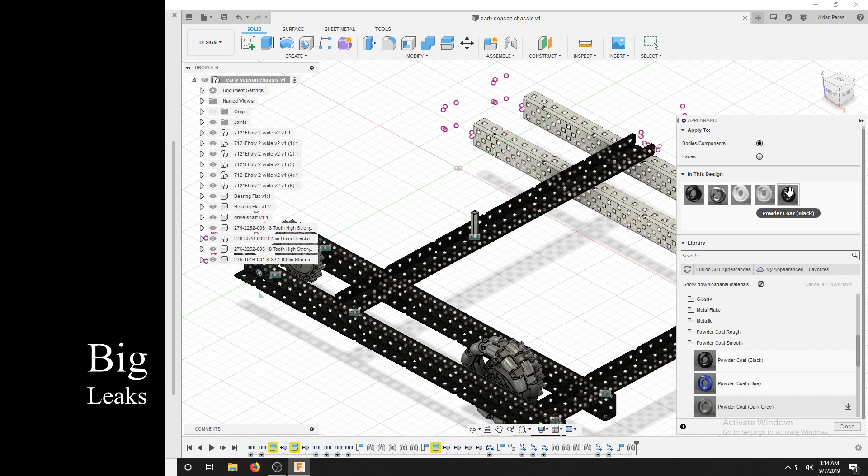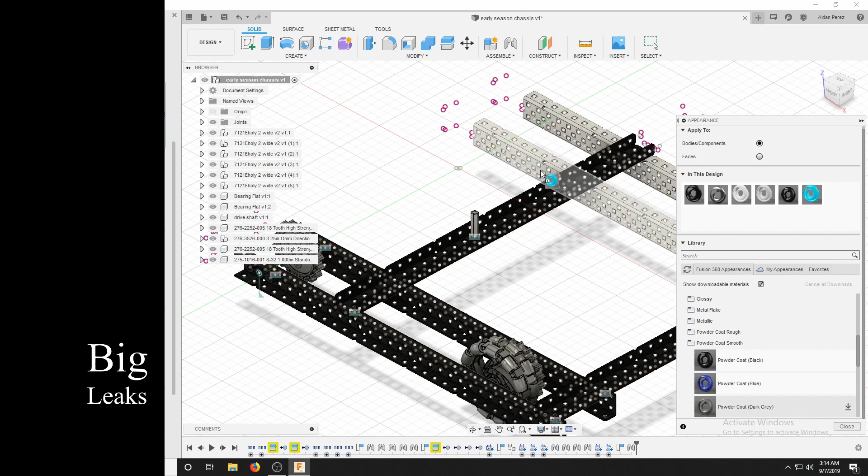You can create custom colors too, and this is really quick, so I'm just going to mention this. If you go in this design, you can duplicate whatever colors you're using. So we're going to duplicate another powder coat black, edit it and rename it. First, before we do anything, we're going to name it powder coat teal. You can select any color you want and create your own custom colors, any color in the RGB spectrum, and add that to your channels as well. That's just a small, quick little fun thing to mention as well.

But those are the very fundamental, basic things you need to know to do basic construction using what I've included here, or that I included in the last video.

I know that maybe my explanations were kind of rough because, as you can see, it's 3:15 a.m. I've been up since 6 a.m. and I was very tired at a soccer game earlier, so I might not be in the most energetic and explanatory of spirits, but hopefully my visual representations were able to convey what I was trying to get.

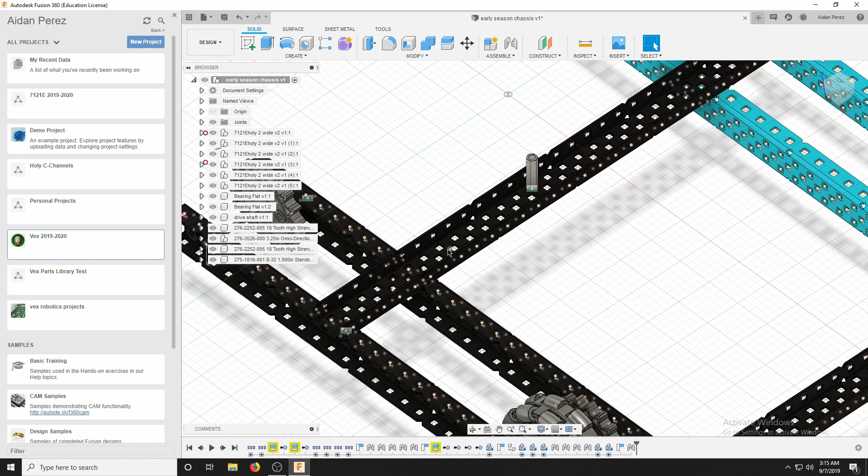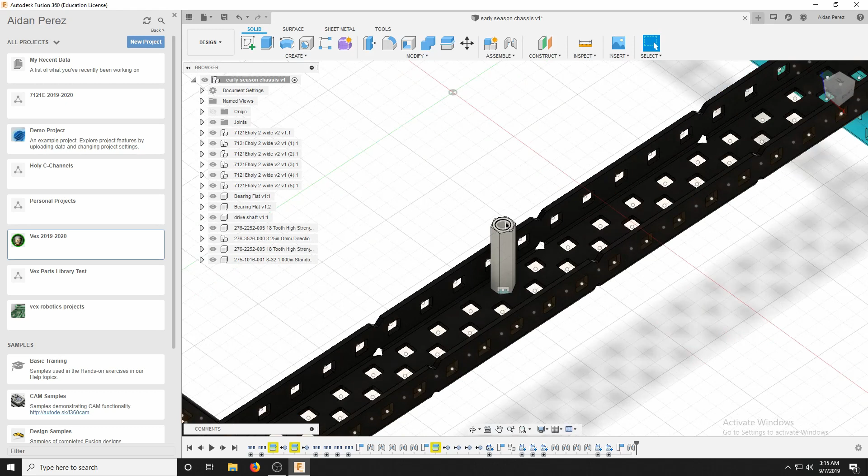Hopefully you understand roughly how to CAD. Because really, you can get the basics, but just experimenting and practicing and doing it a lot and exploring things on your own - a lot of these methods were never taught to me. It was just things like, oh, I wonder how I can change appearances, and then I just discovered all this stuff on my own. Same thing with creating joints from these holes. I was never explicitly told that's what you can do, but you just got to experiment with it, try different fun things, trial and error, and you'll end up learning a lot of new skills.

So it's a really worthwhile thing to do. It's really good for prototyping designs and just brainstorming stuff before actually making it with metal. So I highly recommend that you guys take up CAD, and maybe check back on this video every so often to make sure you're doing things right. I know my explanations are really bad, but you can just kind of compare what I'm doing here to what you're doing at home. That's basically all I have to say.

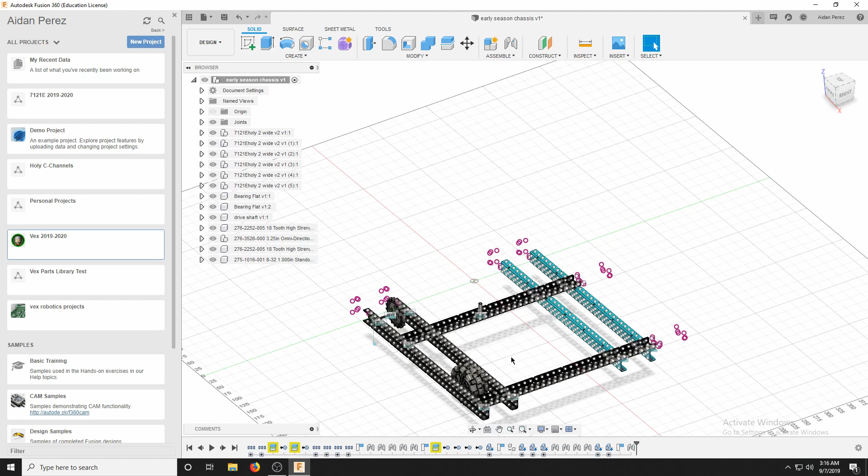I'm going to include, probably throughout the next few weeks and into the future, mini tutorials on how to do different things, like create working hinges in Fusion 360, because that's not something really out there on how to do, and the hinge piece this year might become a little bit popular. So I'll make a tutorial for that and different things.